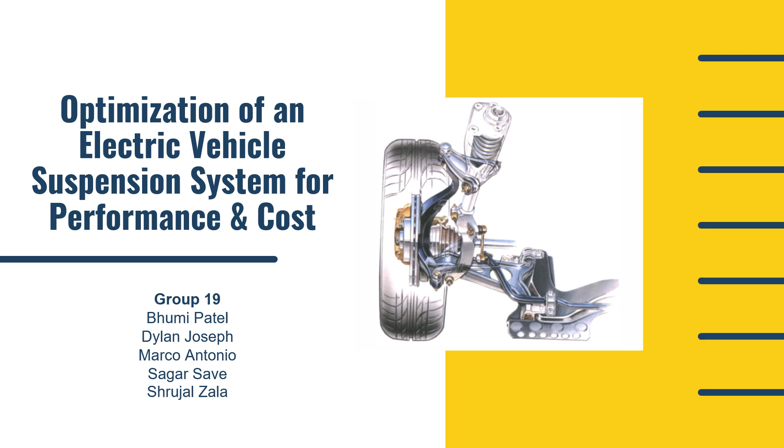In this presentation, we will discuss the optimization of an electric vehicle suspension system for performance and cost. The system-level objective function is a normalized weighted sum of the objective function values of the three subsystems, aiming to maximize overall performance while minimizing cost.

The model will consider design variables such as spring constant and damping coefficient, and it's based off of a Tesla Model 3. The rationalization is that optimizing the design variables of a suspension system is necessary to a vehicle's design, as it ensures the safety and comfort of the user while being most cost-effective for the company.

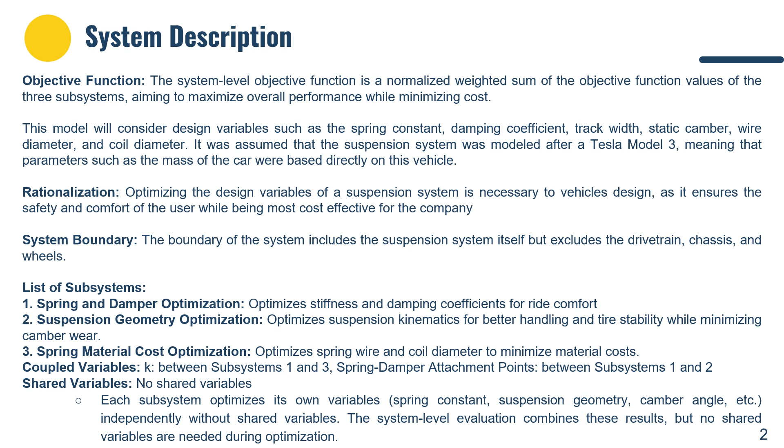The system boundary includes the suspension system but does not include the drivetrain, chassis, and the wheels. The three subsystems include the spring and damper, the suspension geometry optimization, and the spring material and material cost optimization. Coupled variables include the spring constant and the spring damper attachment points, and there are no shared variables.

As you can see, the system flow diagram is shown with the parameters and the variables defined on the right. Subsystem 2 feeds attachment points to subsystem 1, and subsystem 1 feeds the spring constant and the length of the spring to subsystem 3, which shows the coupling between the subsystems. Coupling occurs because changes in one subsystem affect another.

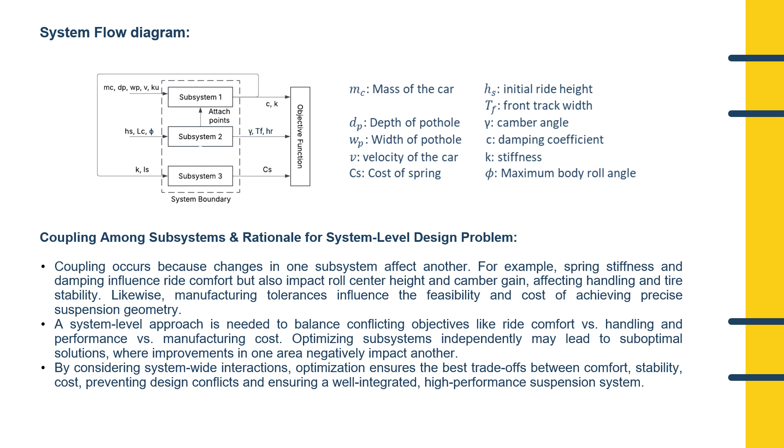By considering system-wide interactions, the optimization ensures the best trade-offs between comfort, stability, and cost, preventing design conflicts, and ensuring a well-integrated high-performance suspension system.

Here is our system-level objective function, which normalizes each individual subsystem-level objective function using the upper and lower practical values, and weights them and sums them together to create a 0 to 1 scale of how well our suspension is performing.

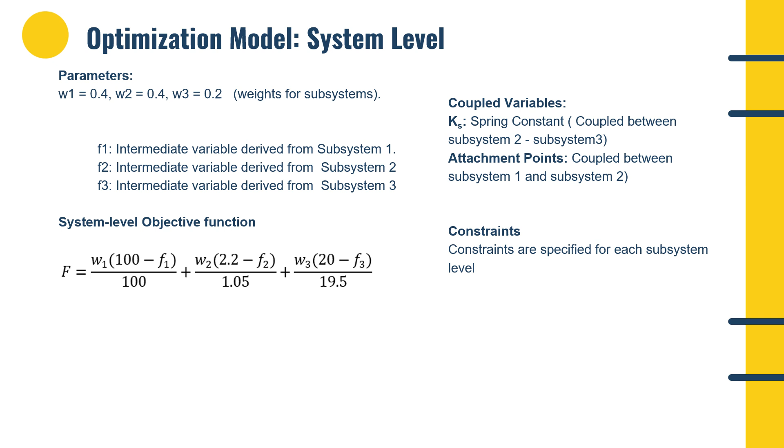For the optimization model of subsystem 1, we have parameters such as the mass of the car and spring constant of the wheel, design variables such as spring constant and the damping coefficient, and a coupled variable such as attachment points, which will be used to calculate the length of the spring and spring damper angle.

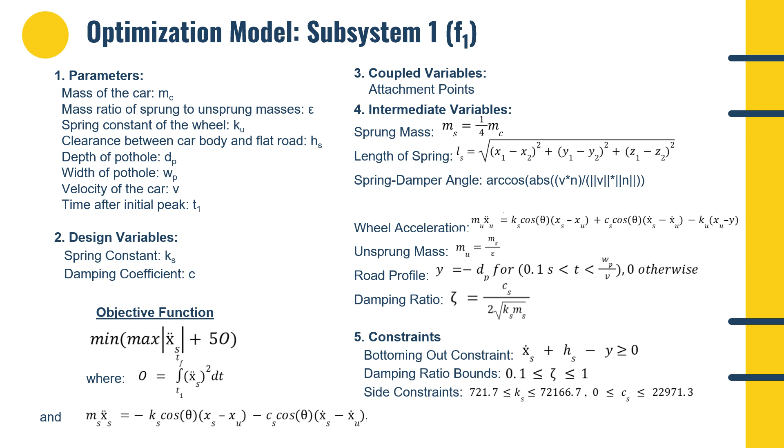Similarly, for the optimization model of subsystem 2, we have parameters such as roll center height, ride height, and maximum body roll angle, design variables that include camber angle and track width, and an objective function that seeks to minimize a weighted square sum between static camber and roll camber.

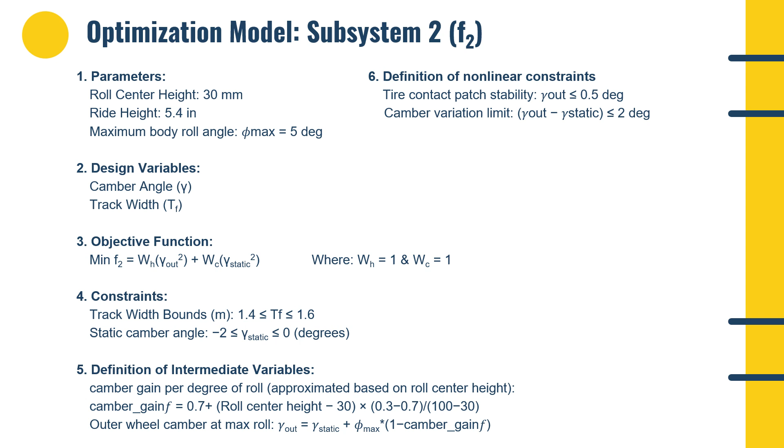We have here some constraints too, intermediate variables, and some nonlinear constraints, which will all make sure that the system behaves accordingly. Finally, for the optimization model of subsystem 3, we have a definition of parameters such as shear modulus of the spring, its density, its free length, and the cost of the spring.

Design variables such as spring wire diameter, overall spring diameter, and pitch of the spring.

The spring constant of the suspension system would be a coupled variable, and our objective function would try to minimize the total weight of the spring while ensuring maximum ride comfort for optimal spring stiffness.

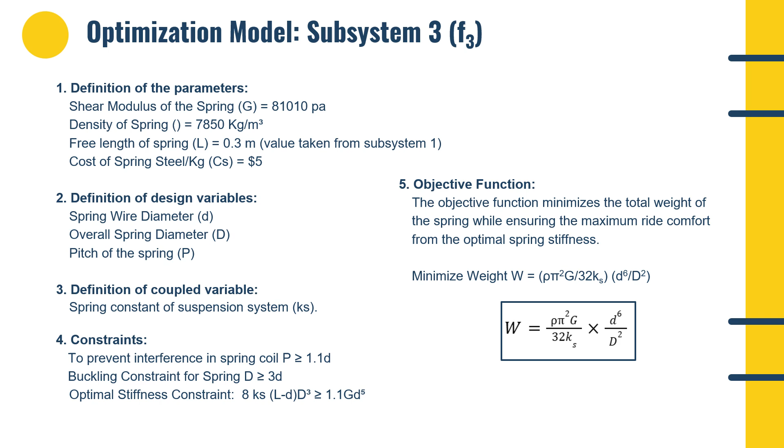Moving on to system-level objective function mathematical modeling, we can see here that the system-level objective function will be obtained through a weighted sum of the objective function values for each of the three subsystems.

To account for the difference in unit values of the outputs of each subsystem, we normalized the outputs of each subsystem and also added weights to account for the importance of each one of them.

The normalization method was done by setting up a range of real-world values for each objective function and comparing how well the minimizations were being performed on these ranges, with a value closer to the lower bound representing a 0 and one closer to the upper bound being a 1.

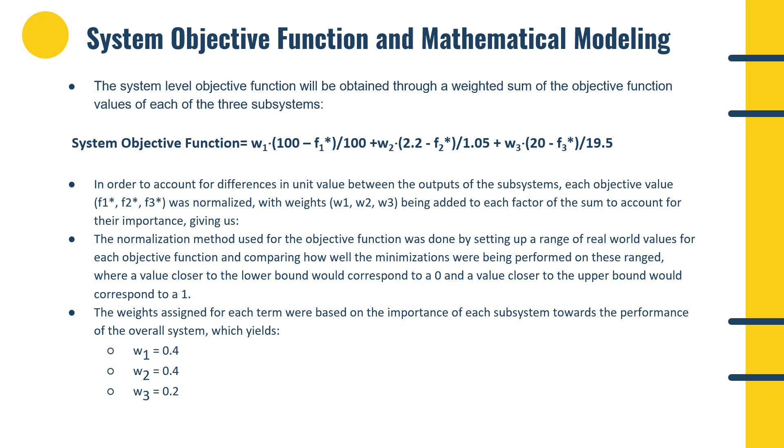And the weights for each subsystem are represented here.

Moving on, we can divide the types of design variables into local design variables, such as spring constant, damping coefficient, camber angle, track width, wire diameter, and coil diameter, and coupling design variables such as the attachment points and spring constant. For the objective and constraint trade-offs, we know that having a higher camber leads to better handling but more tire wear.

Having softer springs improves comfort but risks bottoming out. Lowering wire diameter lowers weight but also lowers stiffness, and lowering coil diameter lowers weight but limits packaging.

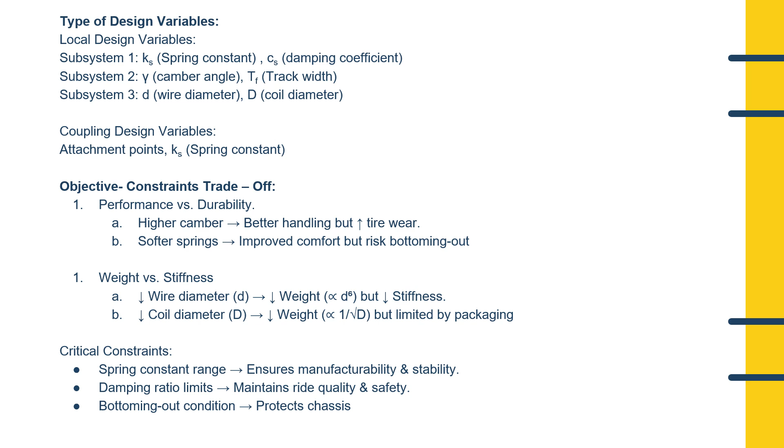Now, for critical constraints, we know that spring constant range ensures manufacturability and stability, damping ratio limits maintain ride quality and safety, and bottoming out conditions protect the chassis.

We are using MATLAB software for this optimization. An algorithm was selected based on the nature of each subsystem. For subsystem 1, fmincon optimizes the spring constant and damping coefficient, which involves continuous, smooth, and differentiable functions.

For subsystem 2, GA handles complex nonlinear design variables, ensuring global optimization in the suspension geometry. For subsystem 3, like subsystem 1, fmincon is used here for optimizing continuous differentiable functions, particularly for spring material cost.

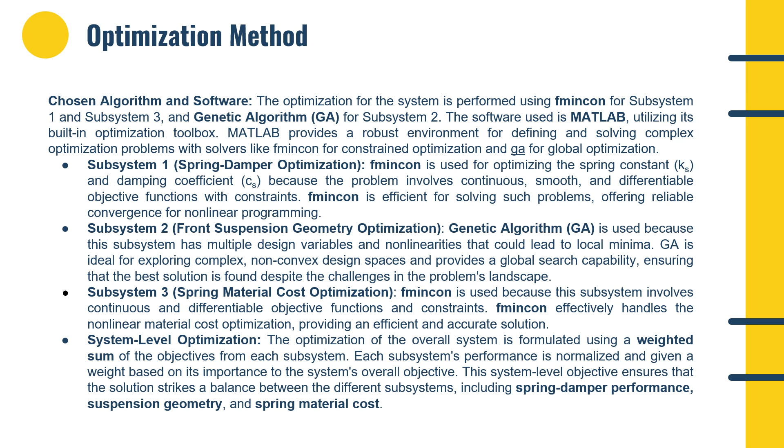Then at system level, we combine the results from all subsystems using a weighted sum, balancing performance, cost, and other factors.

The system model differs from individual subsystem models because it combines output from subsystems. Each subsystem influences the others, and their optimization is refined through an iterative feedback loop to balance performance, handling, and cost. Spring length in subsystem 1 is a critical link as it is passed to subsystem 3 for calculating material cost. The interlinking ensures a cohesive optimization across all subsystems.

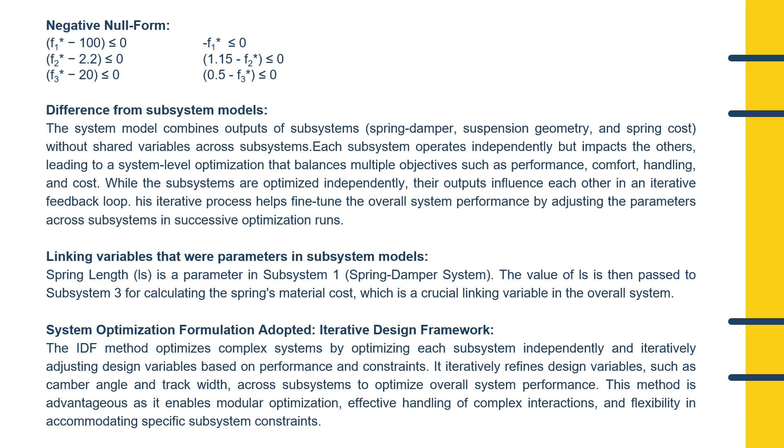At system level optimization, each subsystem is independently optimized and iteratively design variables are adjusted based on performance and constraints. We choose fmincon for subsystem 1 and 3 because their problems are continuous and differentiable, while GA is used for subsystem 2 due to its ability to handle complex nonlinear optimization landscapes.

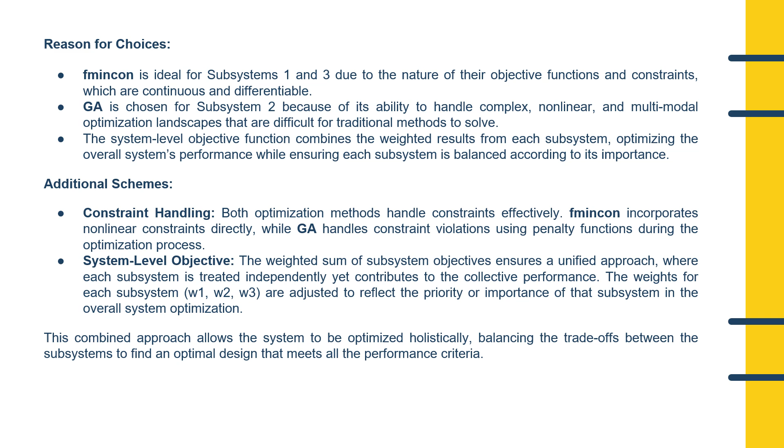The system level objective combines weighted results from each subsystem, ensuring a balanced optimization. Both fmincon and GA handle constraints effectively, with fmincon directly incorporating constraints and GA using penalty functions for violations. This holistic approach ensures that we find an optimal design that meets all performance criteria while balancing trade-offs.

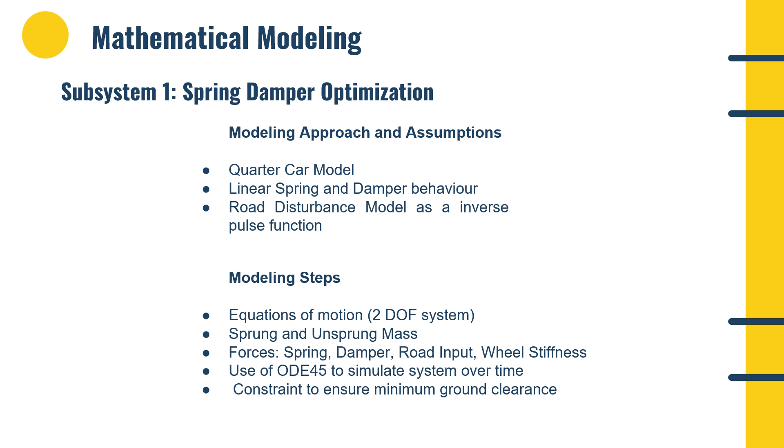Moving to the mathematical modeling part, for the first subsystem, we used a quarter car model with 2 degrees of freedom to simulate suspension behavior. Spring and damper forces act on both sprung and unsprung masses, while road disturbance is modeled as an inverse pulse. We solved the equations using ODE45 and added a constraint to ensure good ground clearance. The goal was to minimize acceleration and energy.

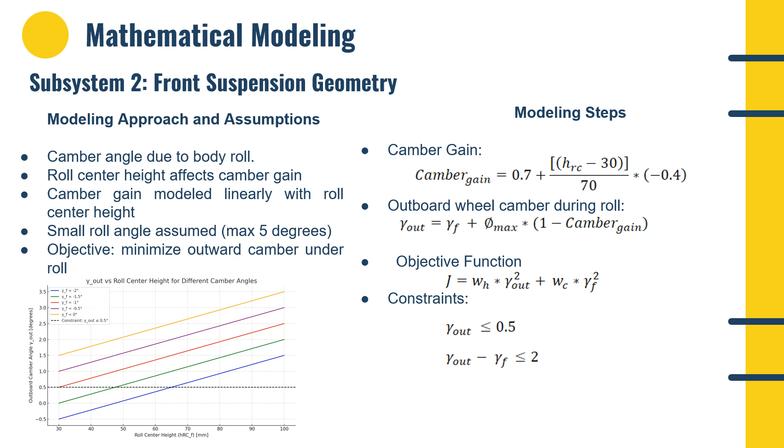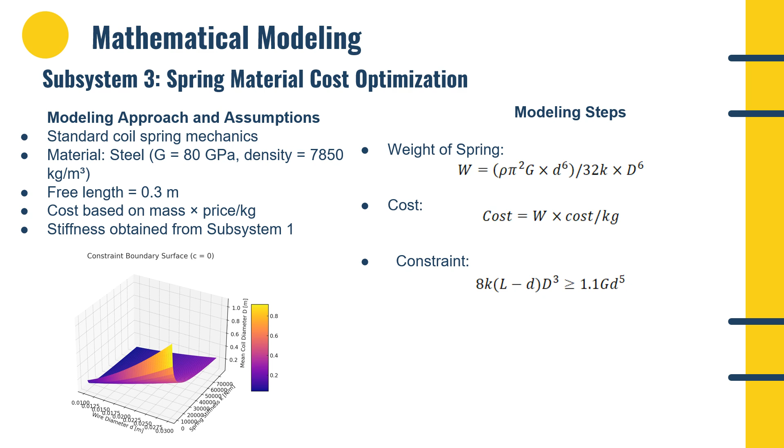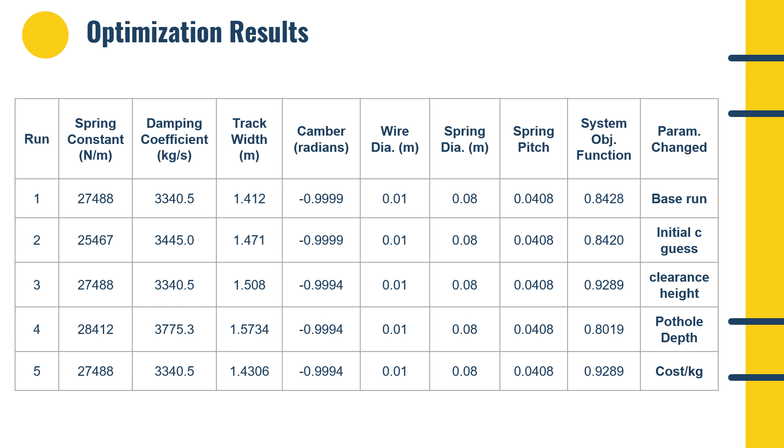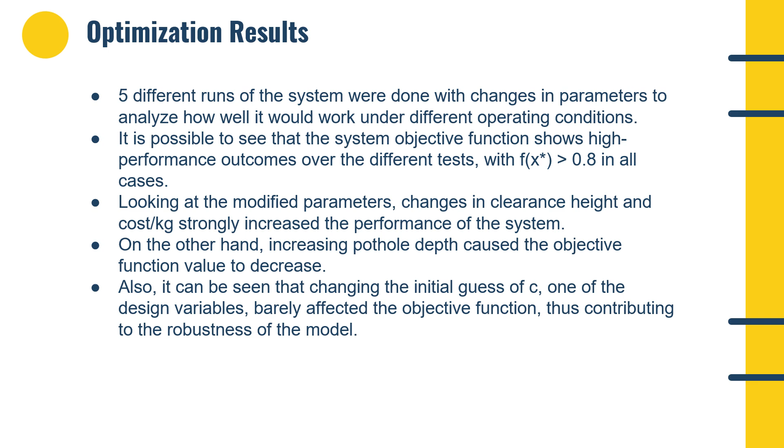In the runs, we observed that changing clearance height and cost per kg gave the best improvement in objective function. Increasing pothole depth had a negative effect as expected. We also found that changing the initial guess for damping had little impact, which supports the robustness of the model.

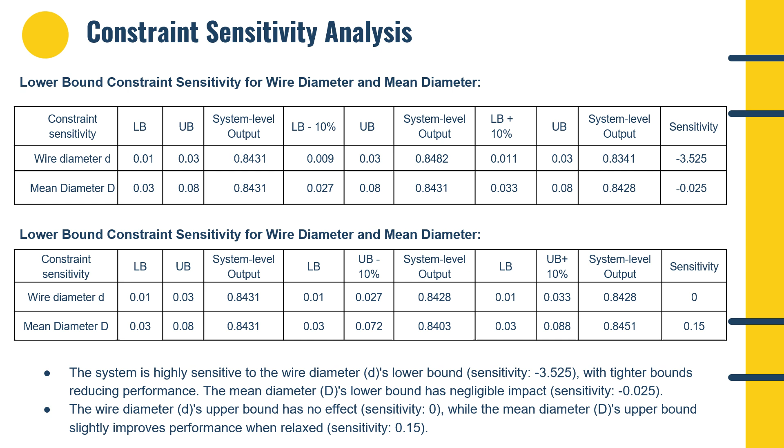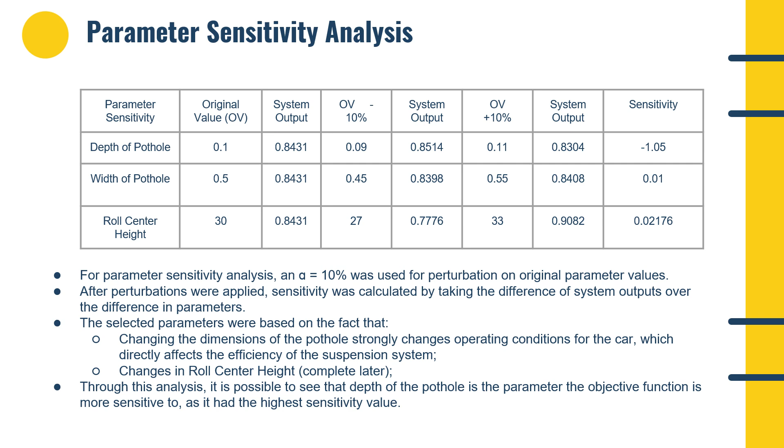In this slide, we'll look into the key findings from parameter sensitivity analysis. The depth of the pothole shows highest sensitivity, indicating its significant impact on suspension performance. The width of the pothole has minimal sensitivity, suggesting a lesser influence on the system's behavior. Change in roll center height showed moderate sensitivity. This sensitivity analysis highlights that optimizing pothole depth is critical for improving the suspension system's performance.

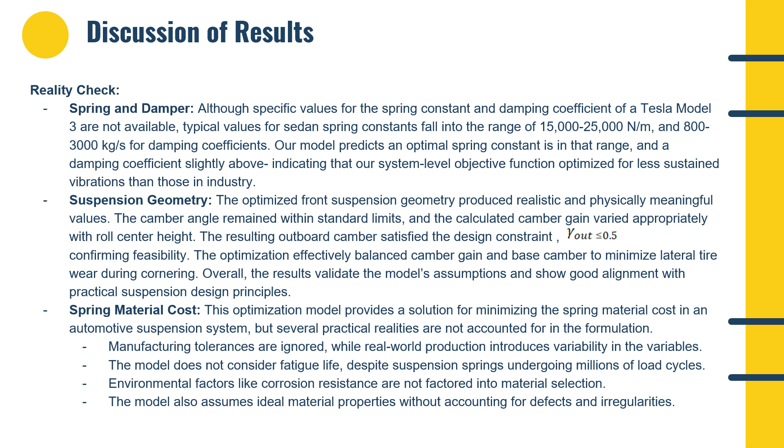For spring material cost, while our model minimizes cost, it doesn't account for real-world factors like manufacturing tolerances, fatigue life, corrosion, material defects. So results are insightful but idealized. Our model produced feasible, well-aligned results, but practical limitations must be addressed for real-world applications.

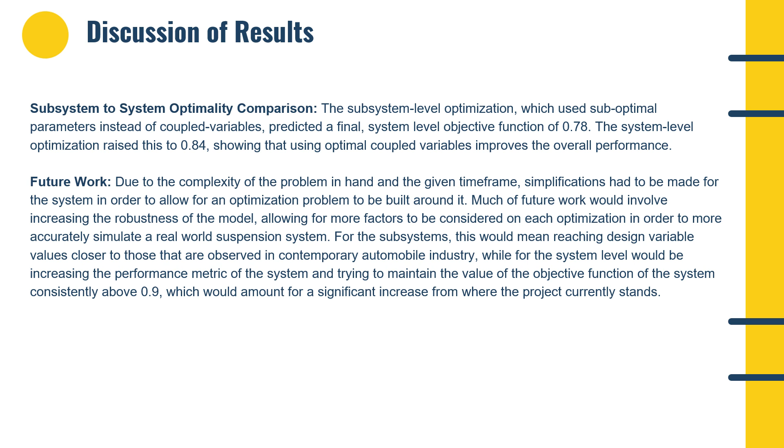The goal will be to consistently achieve an objective function above 0.9, which would represent a significant improvement from the current state of the model. So while our model shows strong promise, there is a clear pathway forward for even better real-world applicability.